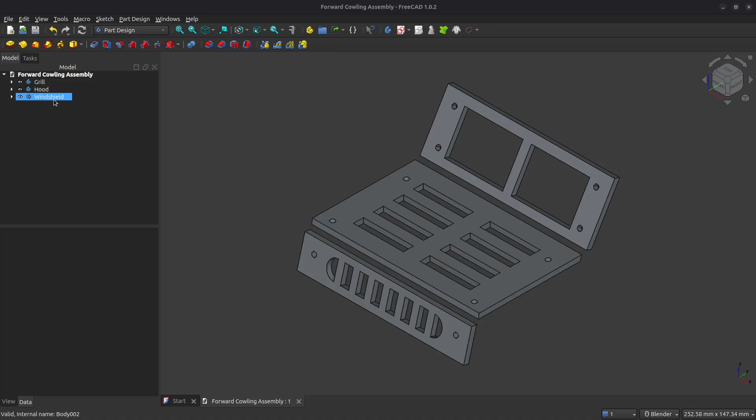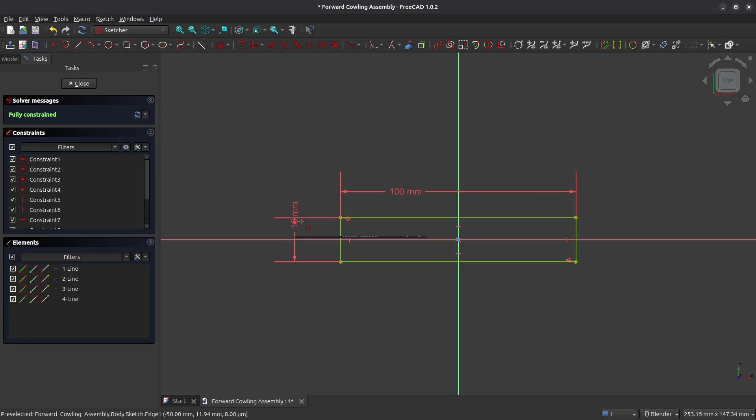Begin by creating a new body and a new sketch, and we'll put that sketch on the XY plane. Begin by creating a rectangle, and we'll make this one symmetric around the origin. Set the length of this rectangle to 100 millimeters, and we'll set its height to 19 millimeters. All right, close that, and we will pad that out to 3 millimeters.

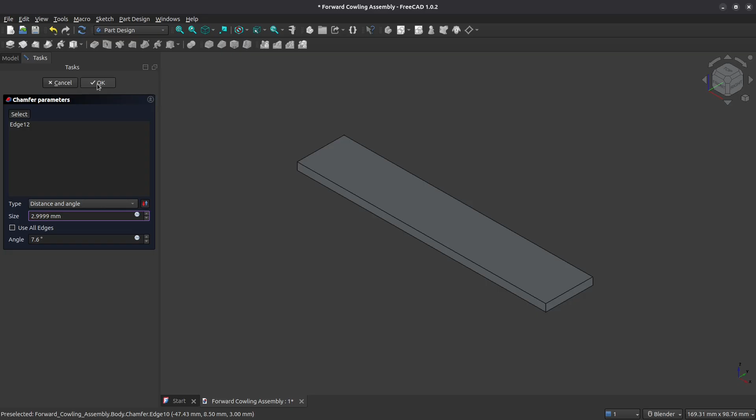Next, we're going to add some chamfers to this shape. Begin by selecting that back edge there, and we're going to chamfer this one. From the type, select distance and angle, and we're going to give it an angle of 7.6 degrees. We're going to set the size to 2.9999 — we can't put 3, that's the thickness of our part, and FreeCAD will not give that to us. So we can get really close, and there's our chamfered part.

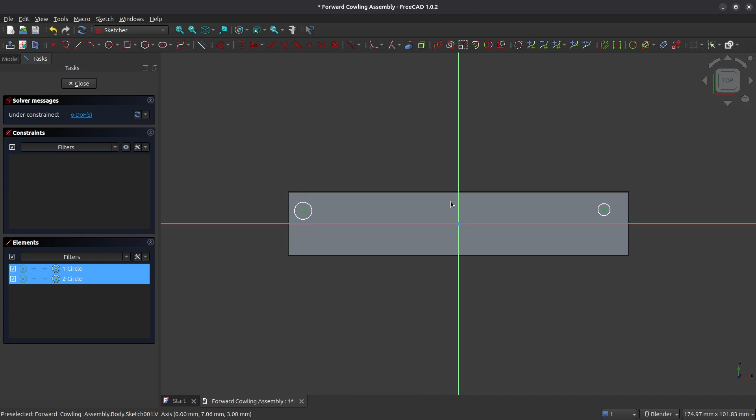All right, the next thing that we're going to do is we're going to add some mounting points. So create a sketch on the top face. We're going to create 2 holes. We're going to make these holes symmetric around the y-axis, and we're going to make it so that they have an equal diameter. And we're going to set these holes to the minor diameter on our PT screws that we're using for assembly.

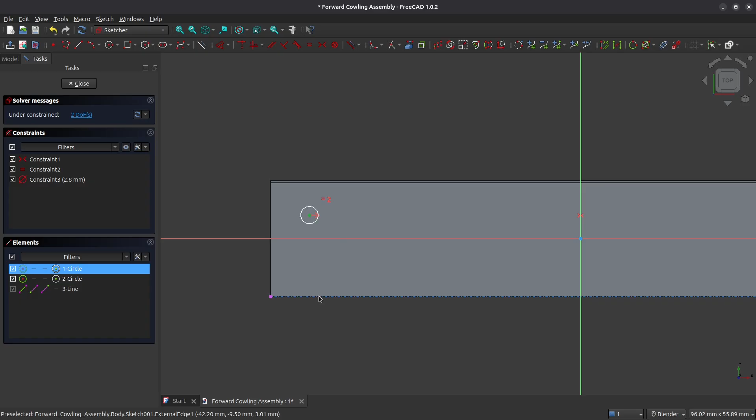All right, so now that we have that, we're going to constrain the location of these. We're going to reference the bottom edge of the grill, and we're going to set the distance from the bottom to 11 millimeters. And we're going to bring it in 7.5 millimeters from the edge. With that, our 2 mounting points on the grill are fully constrained. So we can close out of the Sketcher workbench and we can pocket these.

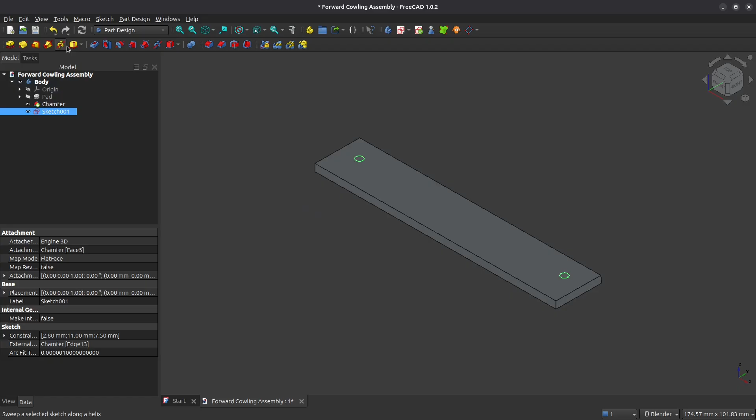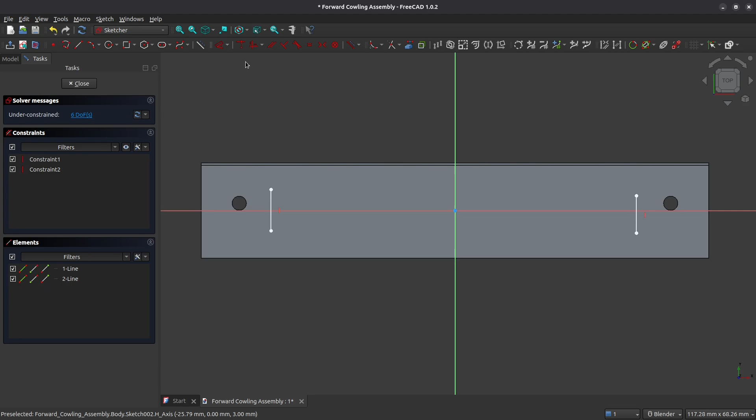Next, we're going to add the slats to the grill. So create a sketch on the front, and we're going to begin by creating 2 lines on either side. We'll make sure that we clean up that so that it is vertically constrained. Now we're going to create 6 rectangles.

Now that we have our 6 rectangles, we need to constrain them. We're going to begin by making sure that they're all of equal width, and then we're going to make sure they're all of equal height. We're going to make sure that the lines that we created to start with are also equally long.

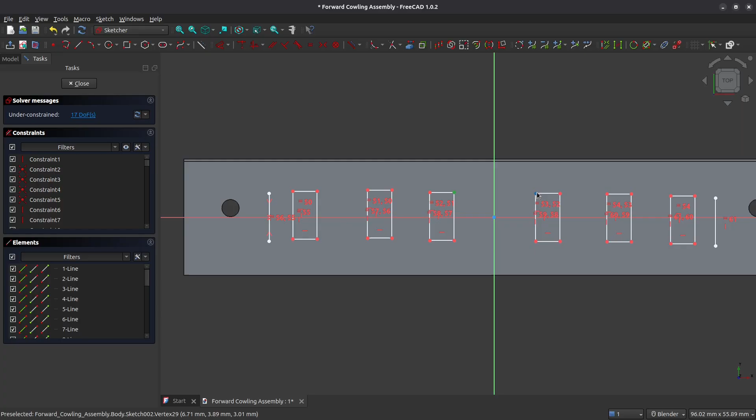So now that we've got that set up, now we're going to take this first line and make it symmetric with respect to the x-axis. We're going to take these 2 inner squares and make them symmetric with respect to the y-axis. And our next step is to make these all collinear.

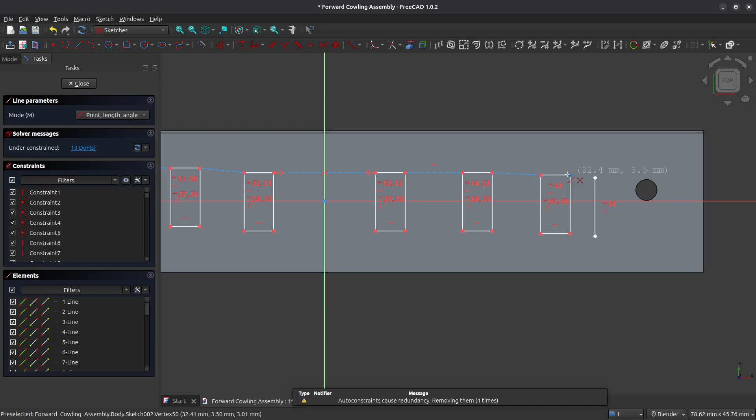And we're going to do that using some construction geometry here. We're going to create a line between each one of these squares. Now, those ones are already collinear, but we are going to add that there. All right, so now that we've got construction geometry between all of these points, we're going to make sure that they're all vertically aligned. So we're going to select the geometry that didn't end up vertically aligned and bring them into vertical alignment. So the tops of all of our shapes now are collinear.

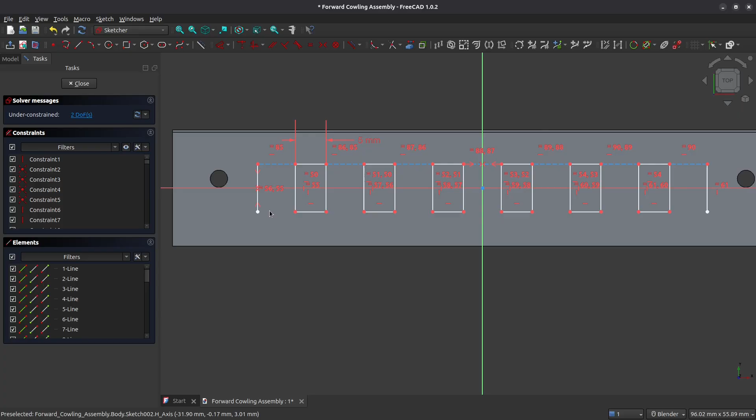Next thing that we're going to do is we're going to constrain the width of our slots. So we're going to constrain those to 5 millimeters. Now we're going to select all the construction geometry and set it to be equal length. And now that we've done that, we can set the width of the construction geometry. So we'll set this to a distance of 4 millimeters. So that tightens up the vertical array here.

And then we're going to set the length of the geometry for our slots, and we'll set that to 11 millimeters. Just bring that out where we can see it. So here are the constraints that we've created so far.

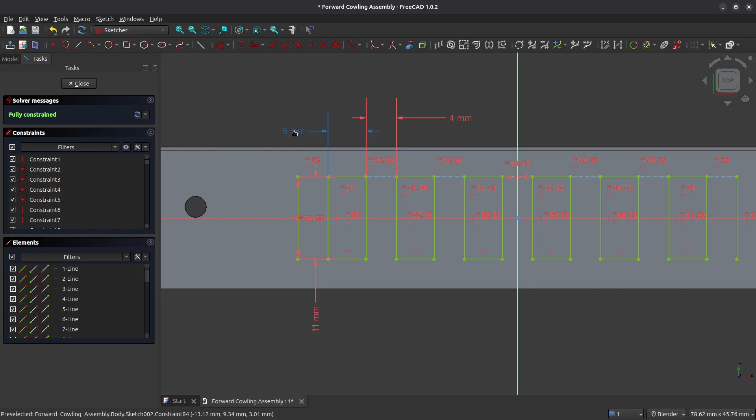And now off to the side, we're going to give the last slots a rounded profile. So we're going to use create arc by 3 points. We're going to select the 2 endpoints of our shape, and we're going to left click on the x-axis. We're going to do the same on the other line.

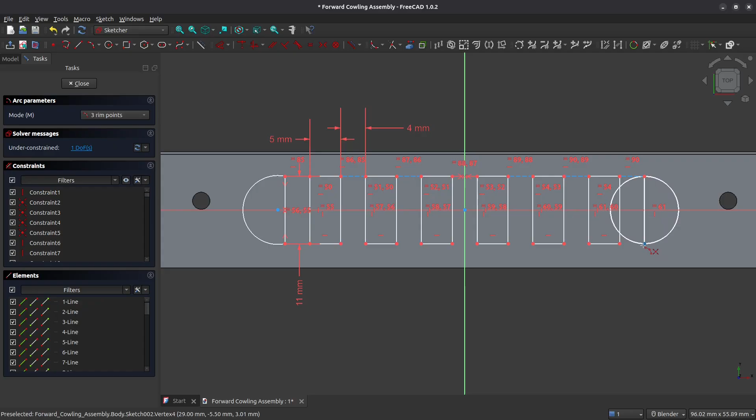And now we have to constrain the midpoint of these arcs. So I'm going to constrain them to the vertical line that we created. Let's try that again. Sometimes in FreeCAD you need to zoom in order to access the point that you're trying to click on, so that's what we're doing here.

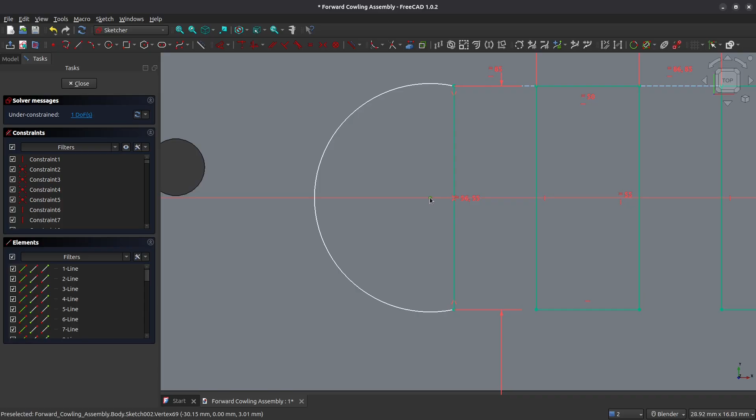And with that, we have fully constrained our slotted array in the grill. And we can close out of the Sketcher workbench, and we can pocket these shapes.

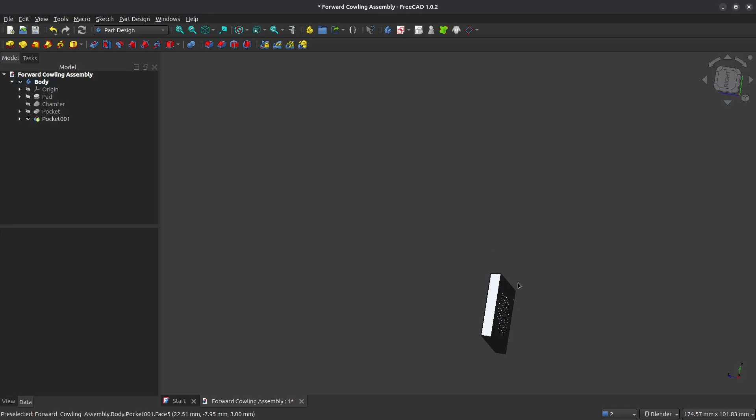All right, and with that, we have completed the grill. It's got a nice chamfer on the top here that matches the slope of the hood. And so when this is fully assembled, the hood and the grill will have one continuous line.

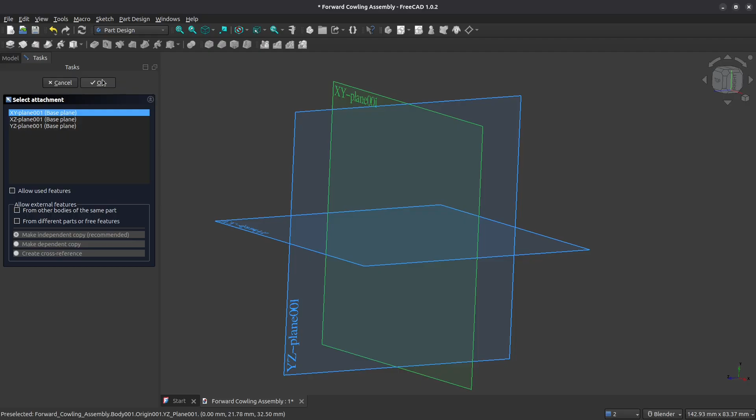Okay, so let's move on now to the hood. Create a new body and a new sketch, and put that sketch on the XY plane. Again, we're going to begin with a rectangle, and we're going to make that rectangle symmetric with respect to the origin.

And we're going to set the horizontal distance to 100 millimeters. We'll set the vertical distance to 62 millimeters.

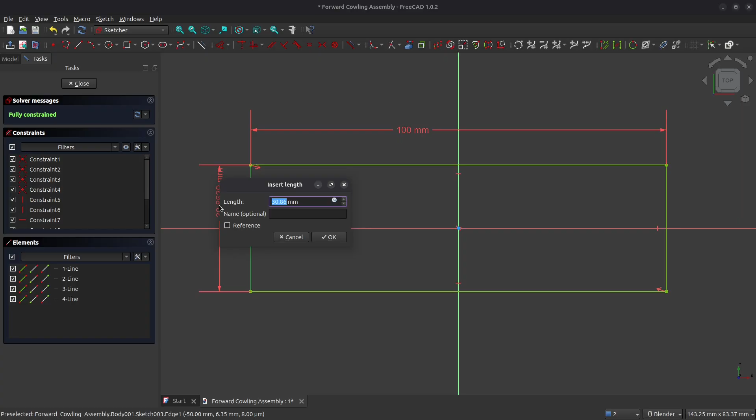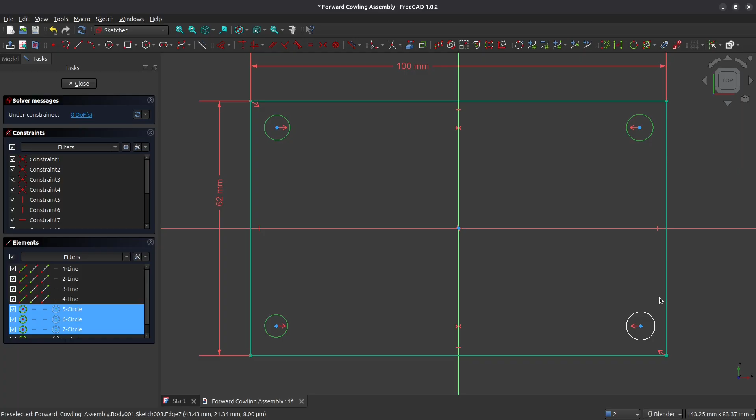Now we're going to create the 4 anchor points that will attach the hood to the mounting bosses on the front fender panels. We will make these mounting points symmetric with respect to the y-axis. We're not going to make them symmetric with respect to the x-axis. We're going to make sure they all have an equal diameter, and we're going to set that diameter to 2.8 millimeters.

All right, now let's set the distance between these mounting points to 44.3 millimeters. And now we need to offset these holes, so we're going to reference the bottom edge of the hood, and we'll set that to a distance of 5 millimeters. There we go, and we'll bring it in from the edge of the hood by 7 millimeters.

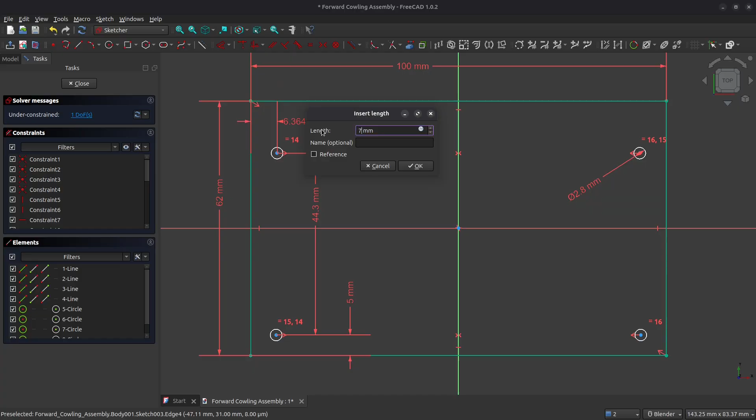All right, and we've got 1 degree of freedom, and that is because these shapes here have not been constrained so that they are vertically collinear. So let's do that. And now our mounting points are fully constrained, and we can close out of the Sketcher workbench.

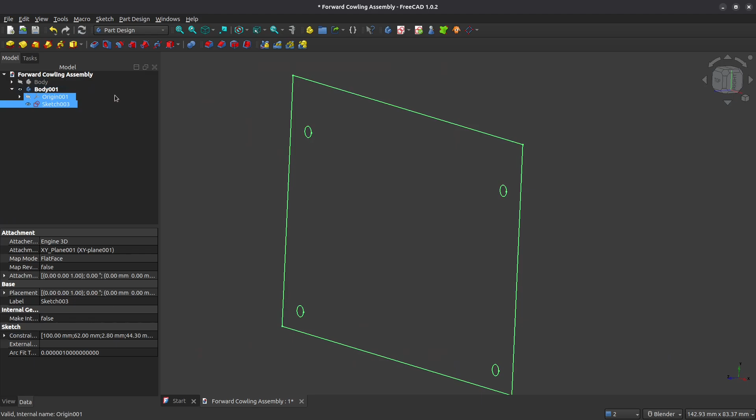We're going to pad out this shape to 3 millimeters. And now we're going to add some chamfers on the edge of this so that it matches up with the other planar faces that it connects up to.

So we're going to begin by selecting this edge here, and we're going to put a chamfer on it of 7.6 degrees. We need to select distance and angle there. So 7.6 degrees, and this one requires a distance of 2.9999, so 3 millimeters, as close as we can get.

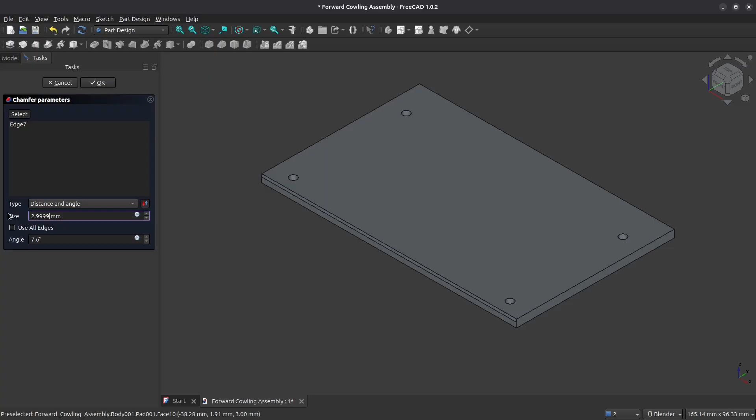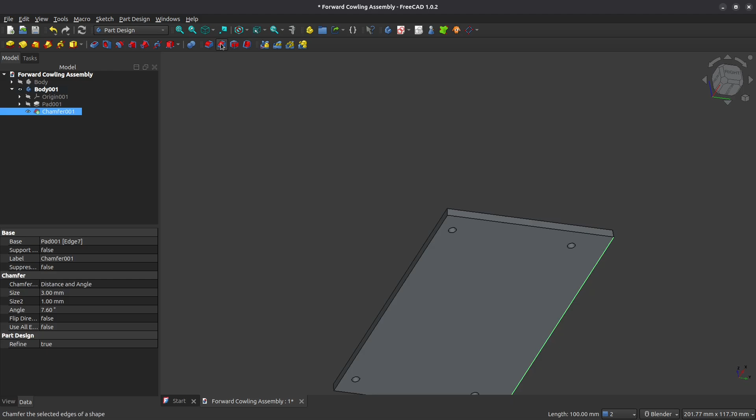We can confirm that we have our chamfer right there, so there it is. And the next edge that we need to put a chamfer on is underneath this part, so we're going to rotate up the part so that we can look at it from under the bottom. And we're going to select that edge there. And this chamfer is going to be 69.19.

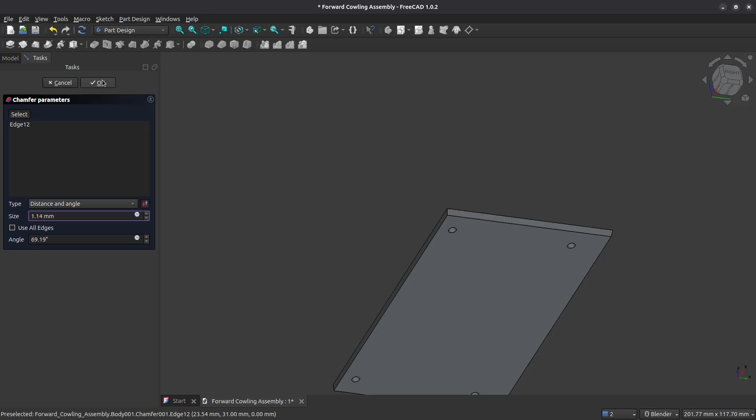These are odd seeming angles, but they were determined in the prototype phase by creating datum planes, and then wherever the datum planes landed, that was the angle I used for the video that I'm making now.

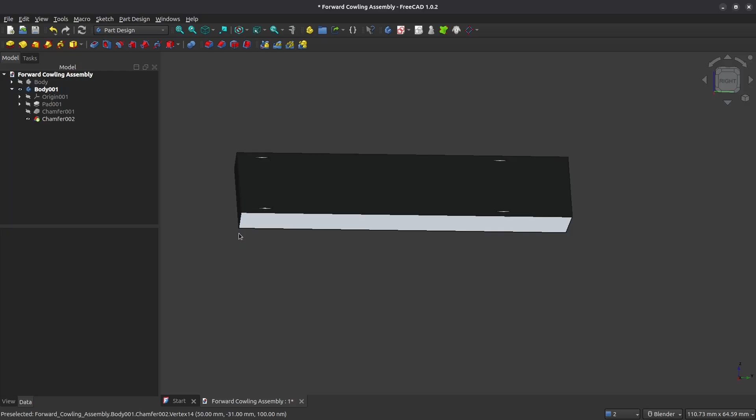So you can see now we've got two chamfers. They've got different angles. This angle here is going to be continuous with the plane that defines the front of the vehicle, so this will run straight into the grille. This one here is sloped at a greater angle because this is where the windshield comes down and meets the hood.

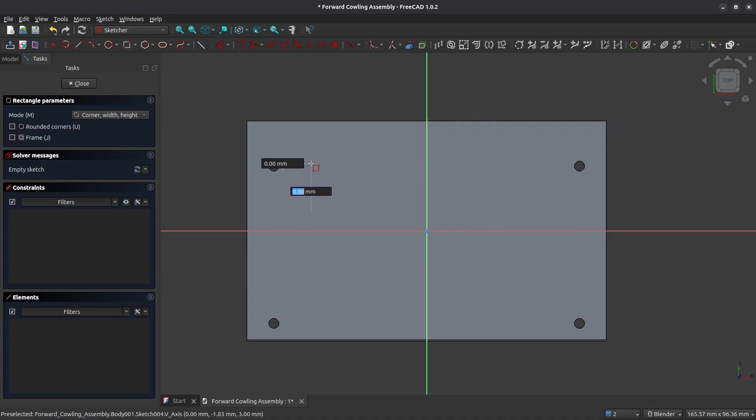All right, now we're going to add the vented arrays at the top of the hood. So we'll left click on the top and we'll create a sketch. We're creating a series of 4 rectangles on either side of the y-axis here, so begin by roughing out those rectangles.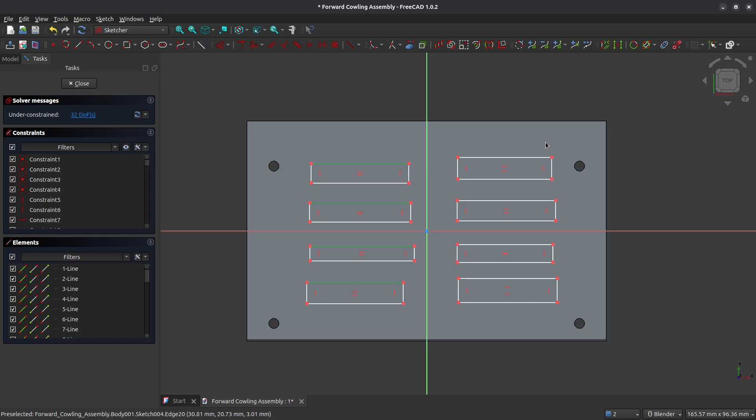Next, make sure that the rectangles are all of equal length. And we're going to make it so that the rectangles are all of equal height.

Now we're going to constrain the top and bottom rectangle so that they're symmetric with respect to the x-axis. And we're going to do that with the 2 inner rectangles as well. We're going to set the 2 top rectangles so that they're symmetric with respect to the y-axis.

And we're going to make the left-hand edge of these rectangles so they're collinear, but we're going to do that with some construction geometry. And we'll make sure that the construction geometry on both of these are vertically constrained.

Okay, so now the left-hand side of the array is collinear. Now we're going to make it so that the edges of the rectangle and the space between the rectangles are also equal. The next thing that we're going to do is we're going to make the right-hand edge of this array so that it's collinear.

We're going to start by making sure that we have horizontal constraints placed on these rectangles. Now we can establish our vertical constraints.

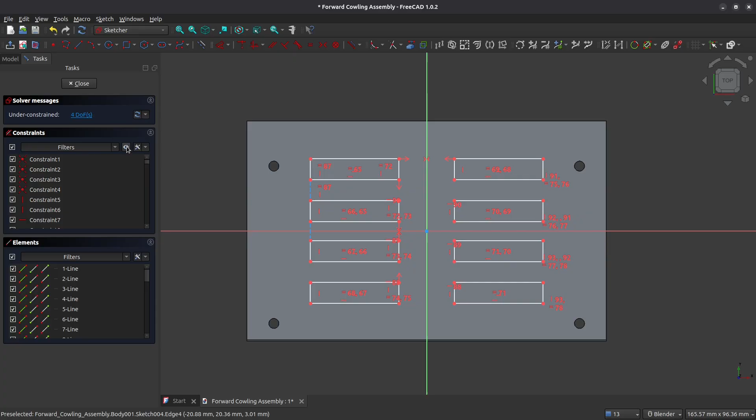In order to clear this up a little bit, I'm going to hide the current constraints so that we can now dimension the look of this array. I'm going to give the vertical length of this 6 millimeters, set the width of this to 30 millimeters, and set the distance between these 2 points to 10 millimeters.

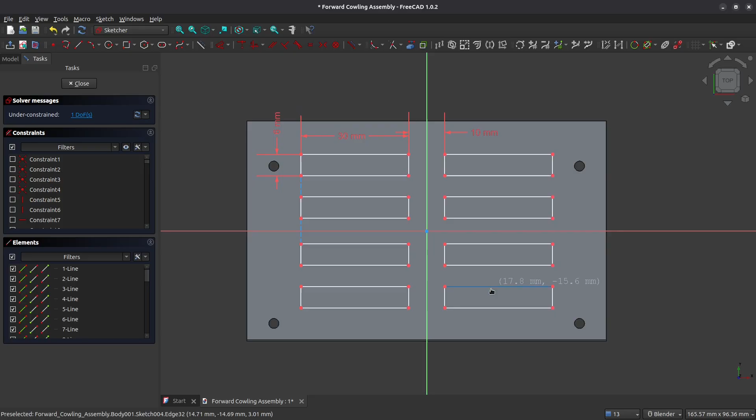We've got 1 degree of freedom left, and it's the distance between these 2 bottom quadrants, so I'm going to set these so that they're the same length. With that, the vented array is now fully constrained, so we can close out of the Sketcher workbench, and we're going to pocket these shapes.

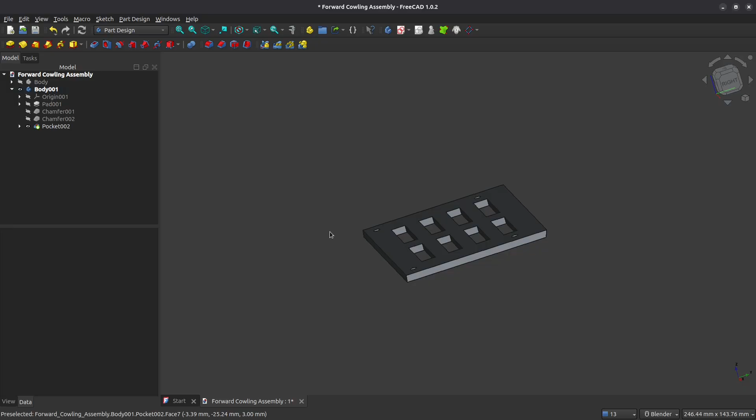With that, the hood assembly is fully complete and ready to be 3D printed. So let's move on to our next shape.

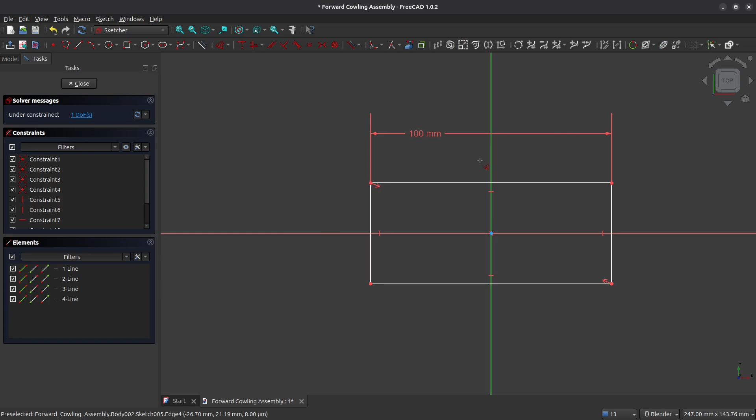Create a new body and a new sketch. Create that sketch on the XY plane and begin by creating a rectangle. As with the others, we're going to make this rectangle symmetric with respect to the origin. We'll set the horizontal length to 100 millimeters, and we'll set the vertical length to 35 millimeters.

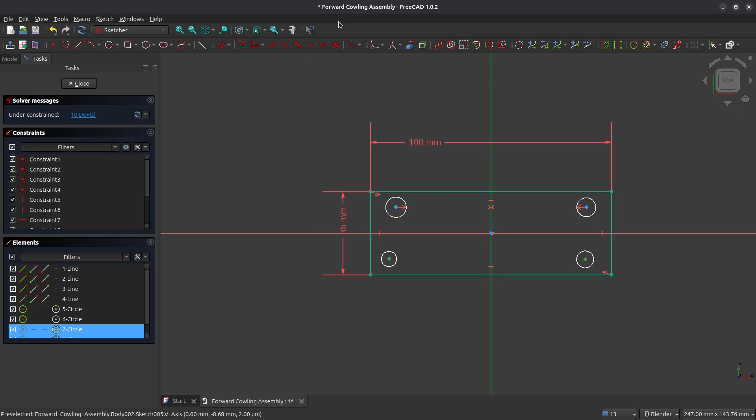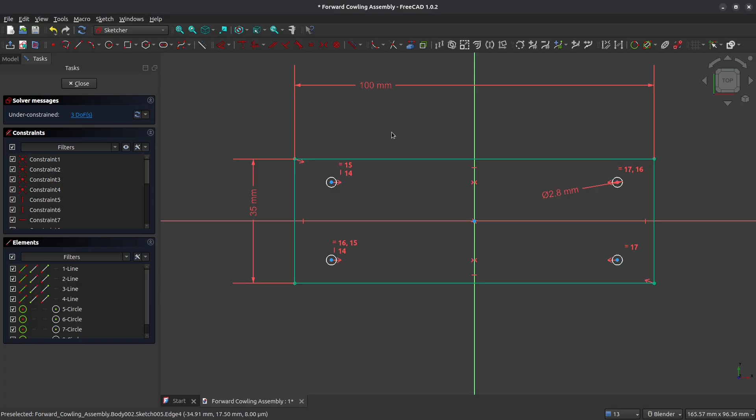Let's now add 2 mounting points on the top and 2 mounting points on the bottom. We're going to make it so that these points are symmetric with respect to the y-axis, and make sure that they are vertically collinear. We'll set the dimensions of the diameters of all these so that they're equal, and we'll set the diameter of our 4 mounting holes to 2.8 millimeters. Now we're going to set a distance between these mounting holes to 19.5 millimeters.

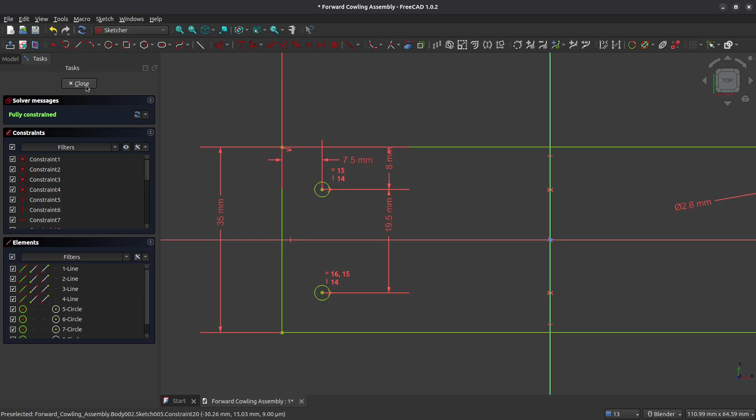And we're going to offset these holes from the top of the windshield. I'll offset these by 8 millimeters, and we'll bring them in from the edge by 7.5 millimeters. All right, and so with that, we can see that the sketch is fully constrained. So we're going to close this, and we're going to pad this out at 3 millimeters.

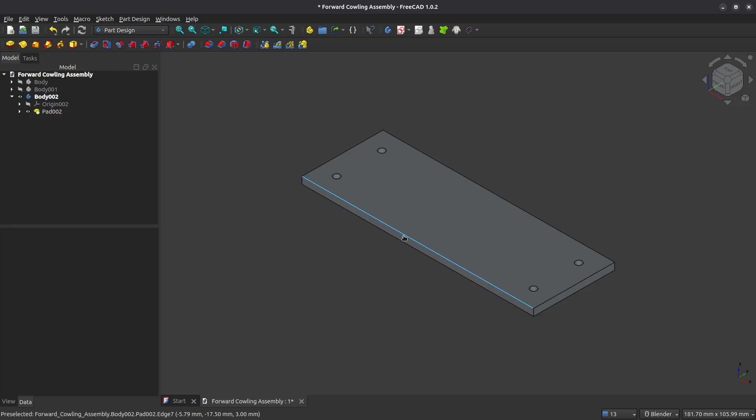So here we are. Next thing that we're going to do is we're going to add some chamfers to the edges of our windshields. Now, these are symmetric chamfers, so we're going to grab 2 edges at once. We're going to grab this bottom edge here, rotate this shape, and grab this edge here. So control-click to grab both edges, and now we can add a chamfer on that.

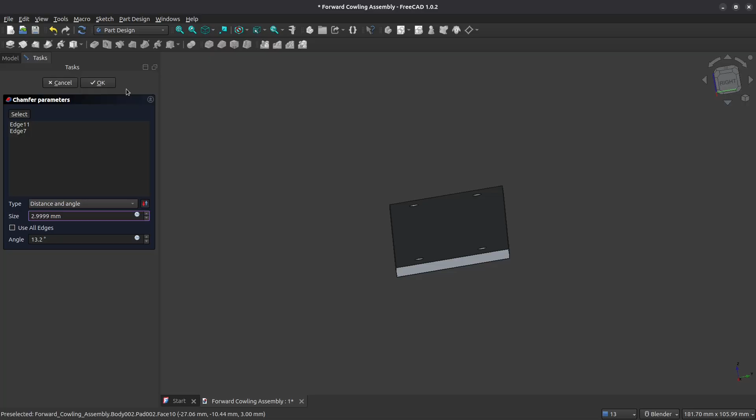So let's maintain that view there and give it a chamfer. The angle that we're choosing for this one is 13.2 degrees, and our distance on this one is, again, going to be 2.9999 to get us as close as we can to 3 millimeters. We look at that from the side, we can see we have 2 symmetric chamfers there.

The next thing that we're going to do now that we have our chamfers is we're going to create the 2 openings in the windshield. So we'll create a new sketch on the top of this part, and we'll create 2 rectangles. We'll make these rectangles so that they are symmetric with respect to the y-axis, make sure that they both have equal height, and separate them by a distance of 5 millimeters.

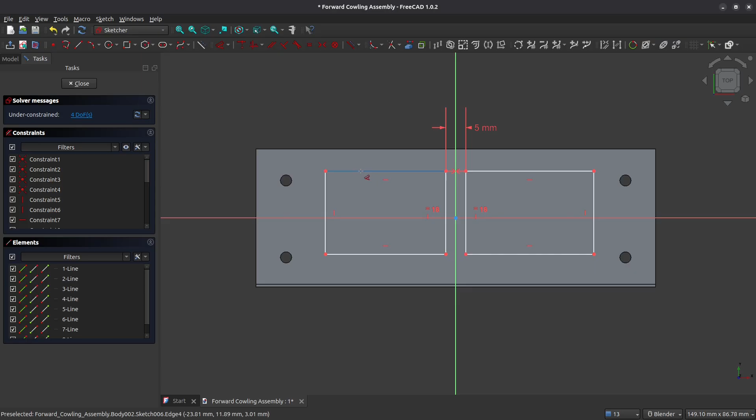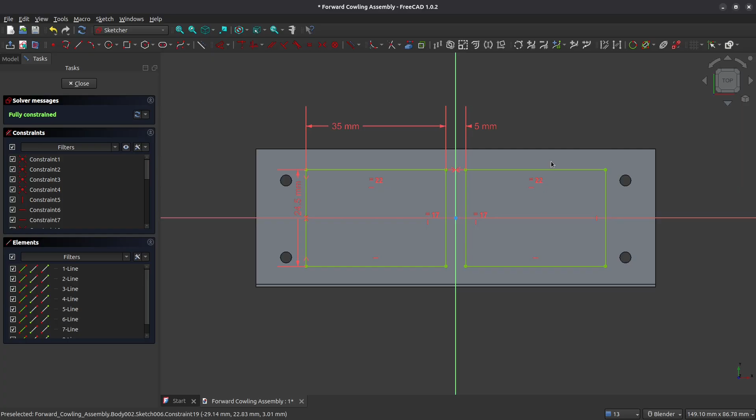We'll give them a horizontal length of 35 millimeters. We're also going to make it so that these are symmetric with respect to the x-axis. And now we will give them a vertical height of 24.5 millimeters. So there we are. We're going to make sure that both of these shapes are of equal length, and with that, we are fully constrained and we can close out of this.

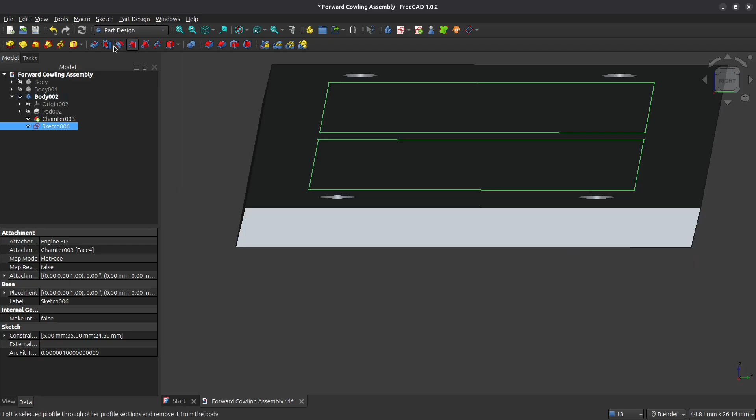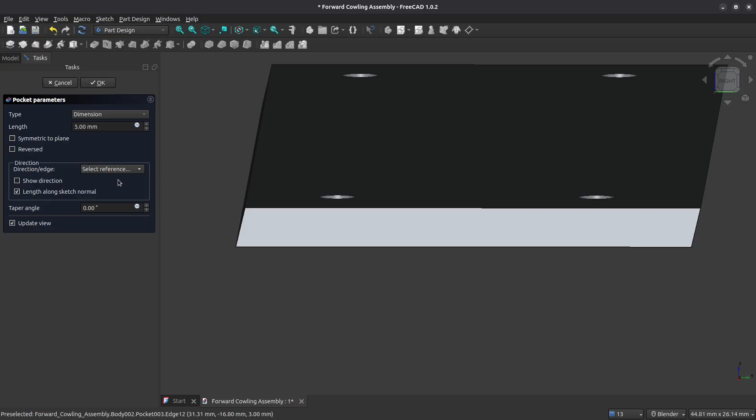Now we're going to pocket these, but we want to create pockets that are sloped to match the profile of the chamfers we've created on this part so far. So what I'm going to do here is choose pocket for these shapes, and you can see that they follow the normal line of our sketch, but we want them to reference the chamfer angle we created earlier. Instead, we're going to click on select reference. I'm going to select this angle here, and when you do that you can see that the pocket now follows the same angle of that 13.2 degree chamfer we created earlier. So I'm going to click OK on that.

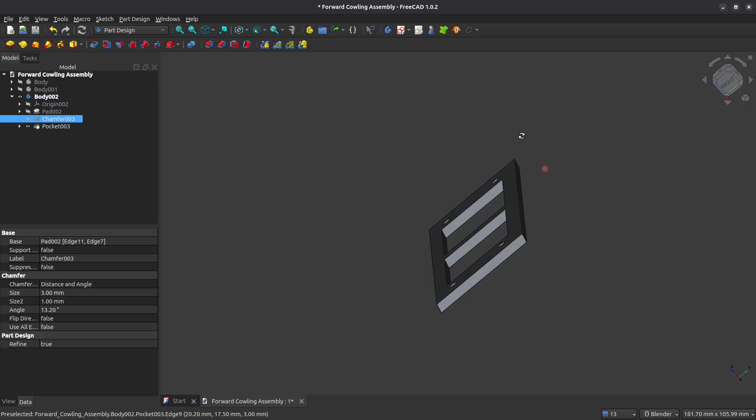And now we have our chamfered windshield cutouts. And when we screw this onto the frame we've created so far, this is what it's going to look like. The windshield will be sitting at an angle, and the slats will follow the horizontal plane of the robot.

With that, we have completed all 3 of the parts for the Forward Cowling Assembly, and the TitanBot officially has its face. The integration between the chassis, fenders, and windshield is seamless. As always, the production-ready CAD files and STLs for these parts are live in the GitHub repository right now.

Coming up in part 14, we're going to finalize the exterior shell. We'll be engineering the top cover elements for the Citadel, and making sure that the logic tray can be accessed for maintenance when needed.